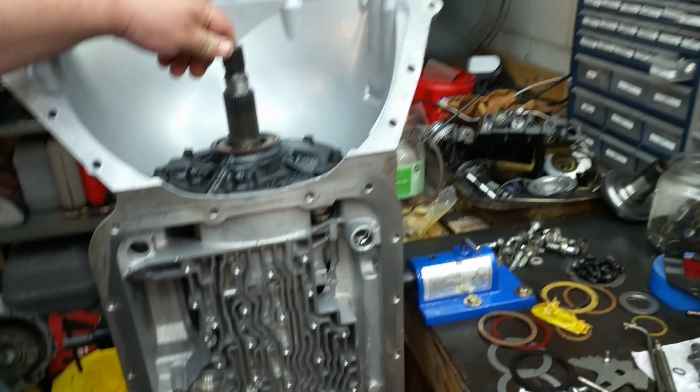Anyway, we're in the final stages of our 4L80E build. We've got all sorts of the insides done. I've been doing just a few minor things outside, like I put the other cooler line fitting in here, and I got the speed sensor in, and then the plug in the rear.

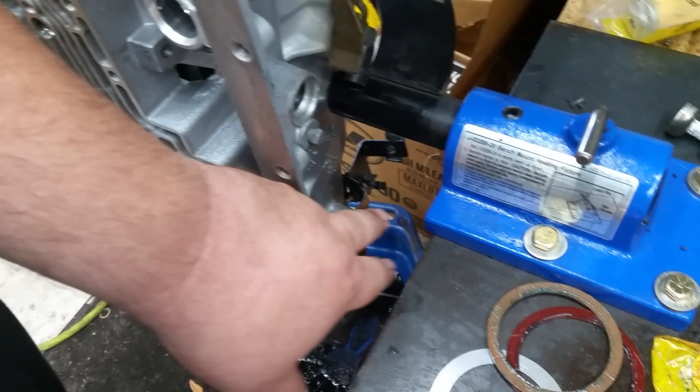If it's two-wheel drive, it'll have another sensor back there instead of a blank plug. But this is a four-wheeler, so the other sensor's actually in a transfer case. I went ahead and put my seal in for my shift linkage, and we're going to work on getting that together, and a few little other odds and ends.

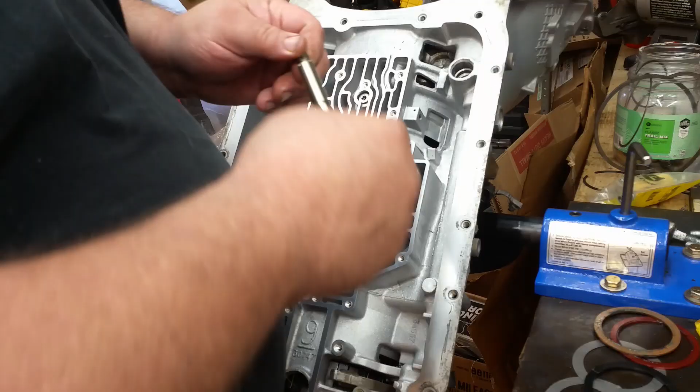So all right, let's start with the shift linkage. Now this rod, the flats are going that way, so this rod will go in here like that. Then you've got your rooster comb, is what I call it, and then you've got your park pawl rod, and this rooster comb goes in the only one way it goes in. There we go. And then this will lay down in here like that. Then your rod will go through, it'll sit just like that.

Then you've got a nut that goes on there, which is right here. That's going to slide on there first. Then that'll go in there, and there's a pin that goes in there. I actually call it a nail, and that's all it is. Here, I'll hold it between my fingers. It's just a little nail, and that's what holds your linkage in. Kind of tap it back in there. There we go. And that locks that in.

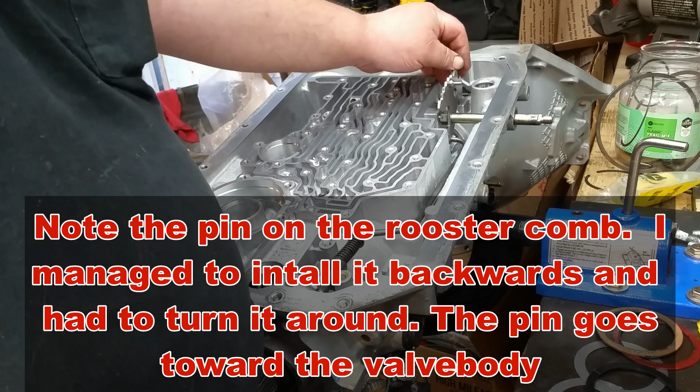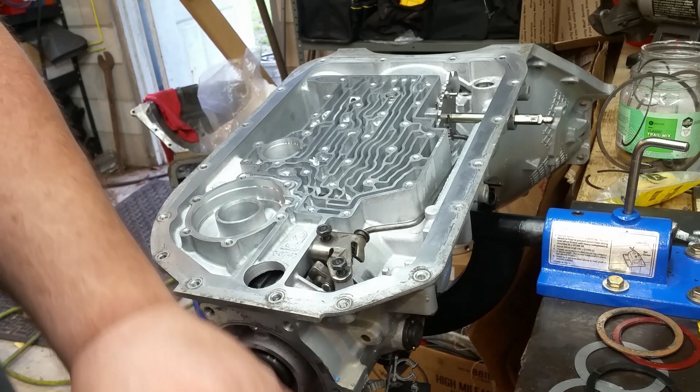Then you just take a wrench and tighten up that nut, which I believe is a 5/8. Yep. Okay, there's that. So you get your rooster comb in. And then you get your park pawl lever or reinforcement. And you got these two bolts down here. Alright. Torque on that's 18 foot-pounds.

Don't forget your spring on this. You know your park pawl's right if it locks when you put it in park. Alright, so we got that. Now it's on to the servos. I guess I need to get the servo.

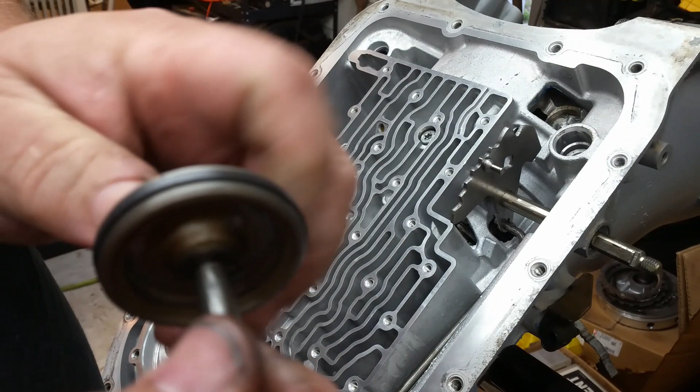Alright, this is your upper band servo. And it takes this pin right here, on this piston. So on this 2-1 apply pin, there's a little E-clip that goes here. There's a spot in the shaft, and you'll have that sticking up. And it takes a Teflon seal ring, and then your spring goes underneath of it like that.

So lube up the bore, lube up your pin and your seal ring. Put your spring in there. This will take a little bit of force to get it in, especially because it's got that Teflon ring on it. And there you go, just like that.

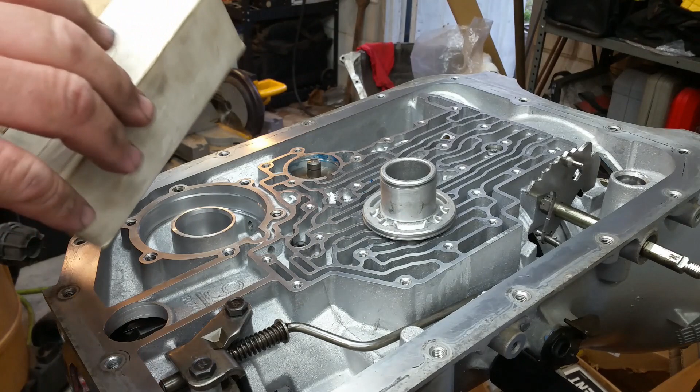Okay, now we're going to do the low reverse. So for that, we're going to need all the low reverse stuff. This is your outer piston. Then you've got an inner piston, and then you've got your cover. But before we do that, we need to check the length on this pin, make sure this pin's the right length. So to do that, we actually have the tool for it, which is this dude here.

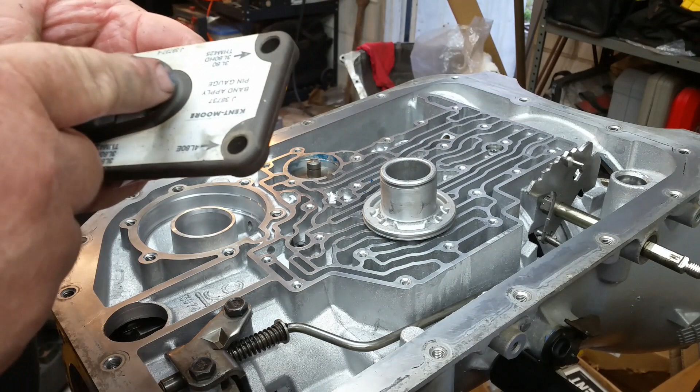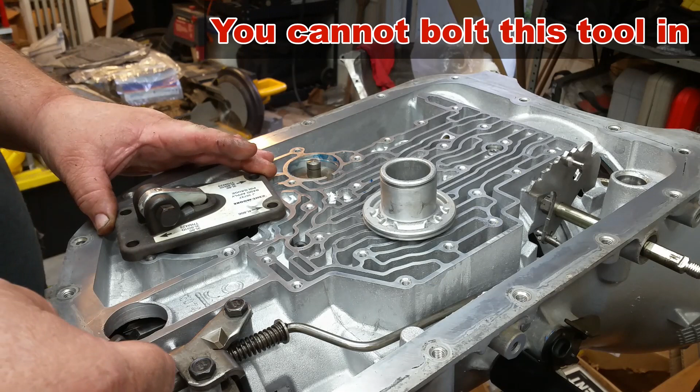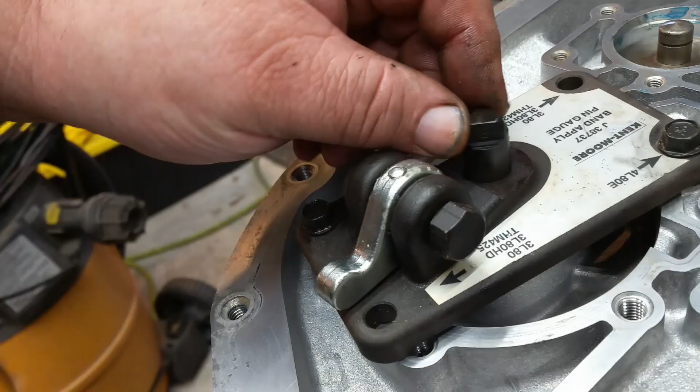And this land has got 3 sides on it. This right here, they're actually numbered too, I do believe. Yeah, it shows A, B, and a C. Okay, so that's what you want to look at. All right, so 25 foot-pounds.

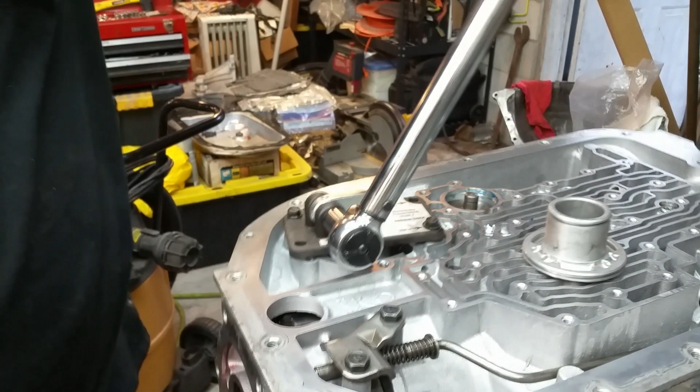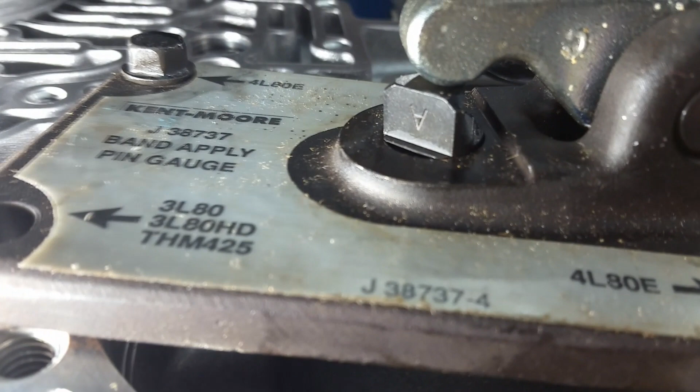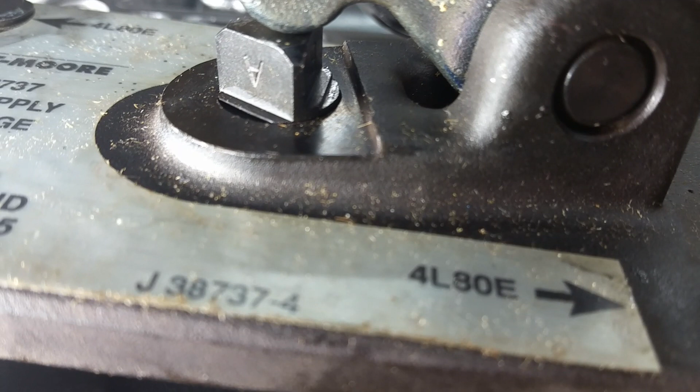And whichever one is flush, if you notice that one there, hang on a minute, you can't see. Alright, if you notice right there, that A, there's 25 foot-pounds, it is flush with the tool. So that's the pin that you'll use, is the A pin. So we need to look at our pin and see which one we've got.

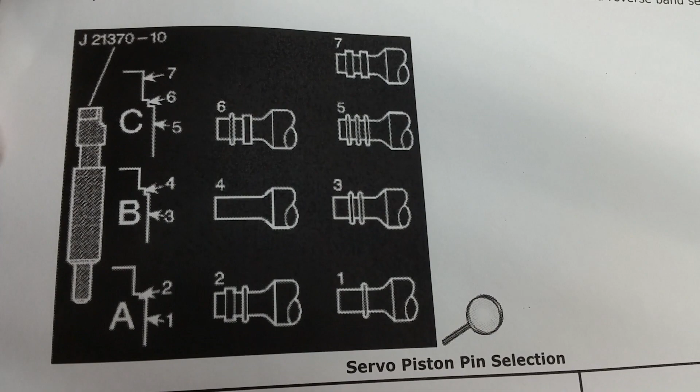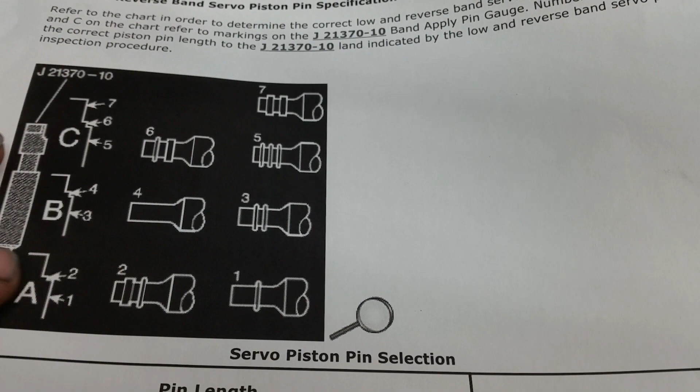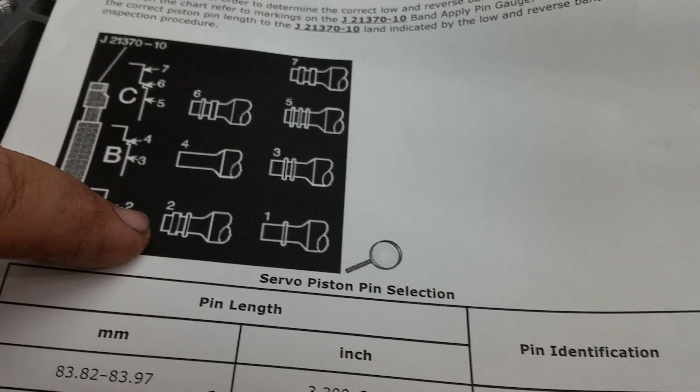Okay, y'all, I went and printed this chart off. So there's 7 different pins that this thing can use depending on where your test pin is. Now, if you remember when we did this, the top flat, which would be that flat right there, it was level with the tool. So being as a number 2, that means that I'm supposed to have a thick flat and a thin flat. I'm going to show this again just so you can see.

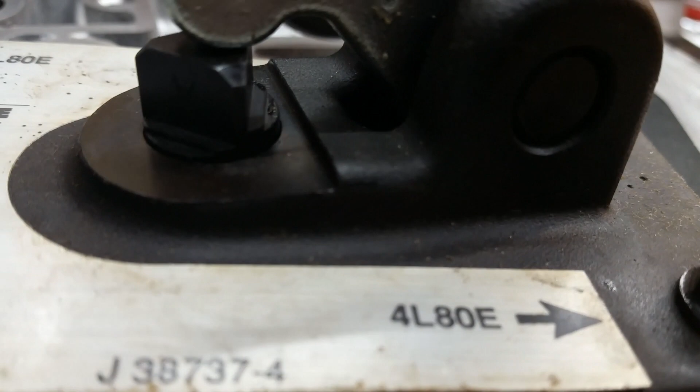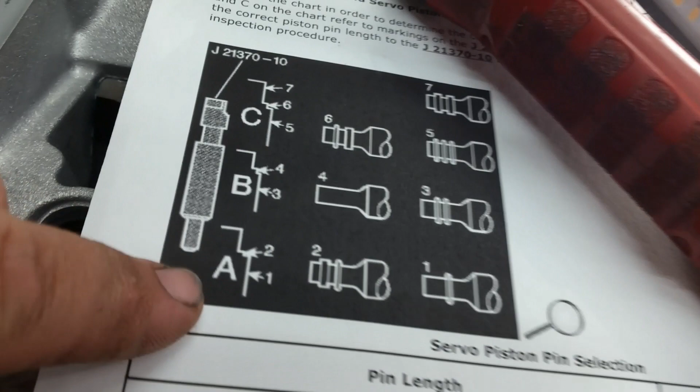Shed a little light on the subject here. Alright, there's our A. See, we're level with the tool. So you match it up with A here, and since I'm at number 2, that's the pin I need.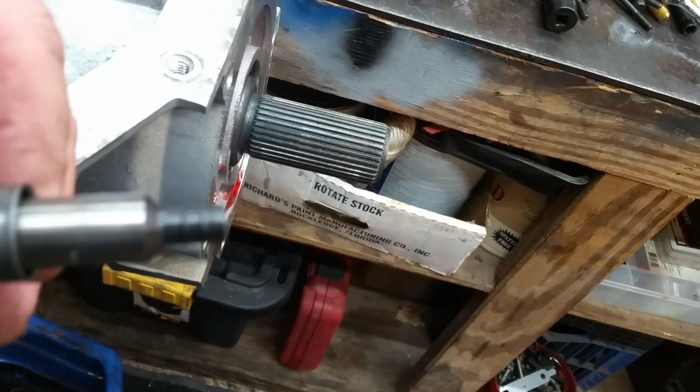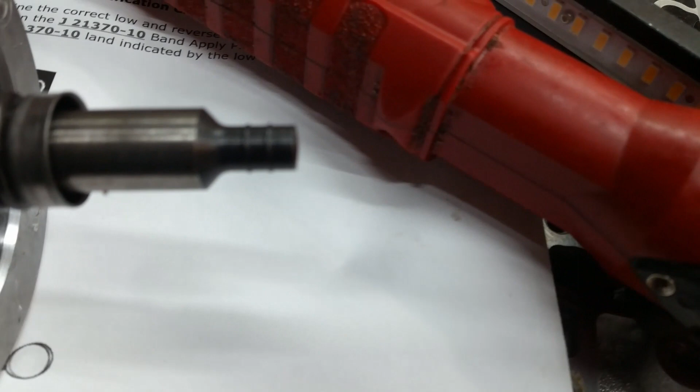So if you notice on here, this is the pin that came out of it. See if it'll focus in on that. There we go. You notice how it's got 2 thin flats. So this is going to be the wrong pin. 2 thin flats would have been a number 3 B, which I'm not.

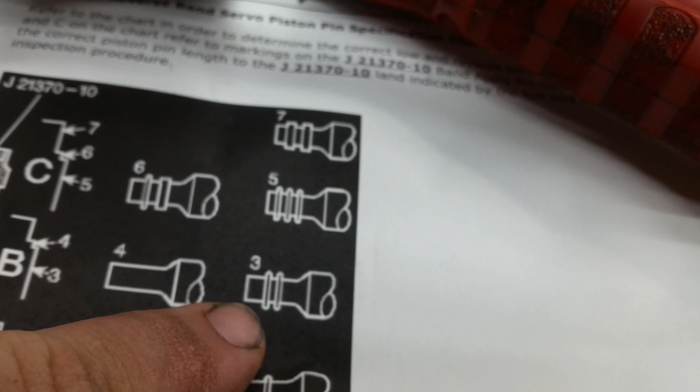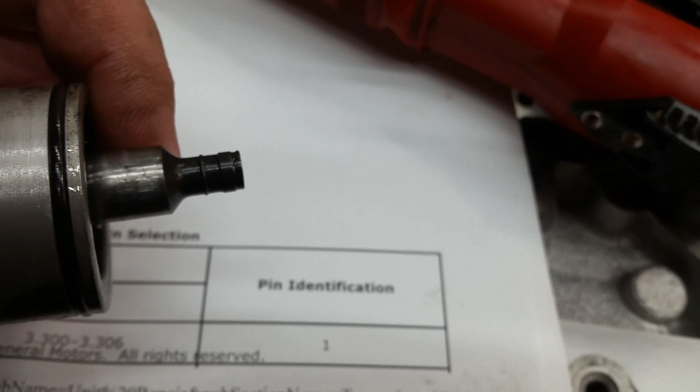So let's go over here to our burnt up 4L80, and that looks like it has the right pin in it. You get a flat on the end and a thin above it. Which, according to that, that's what I need. So we've got a flat, thick flat, and a thin one. So we've got the right pin. So that's the pin we'll use.

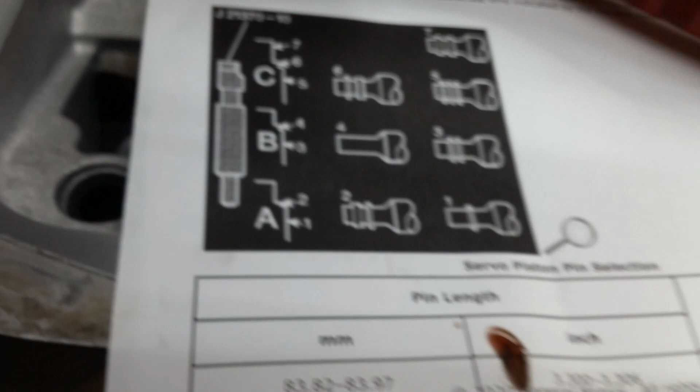Alright, y'all, so I got my, you can see that a little better now. There we go. I got my pin swapped over, and I know you're all asking, why don't you just take that other piston out? It's because this one's already clean. And I got it swapped over. This is a Teflon seal ring that goes on that one. And same for the inner piston. It's got 2 Teflon seal rings on it, which I've already got.

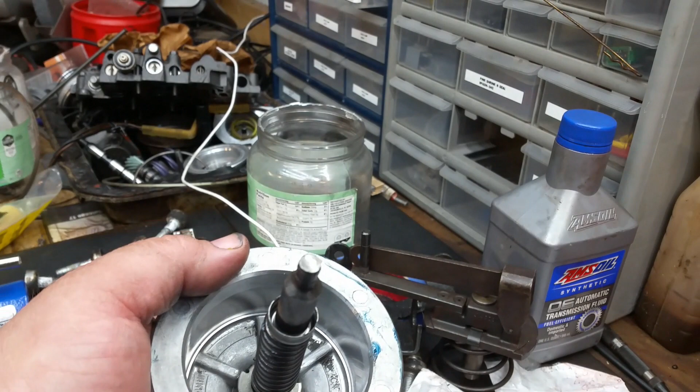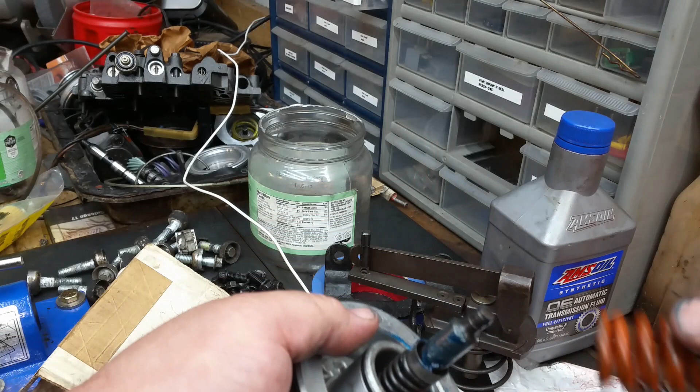This piston here will go inside this one. So just slide it in there. And then this big orange spring goes inside there. Now we have to take our tool off.

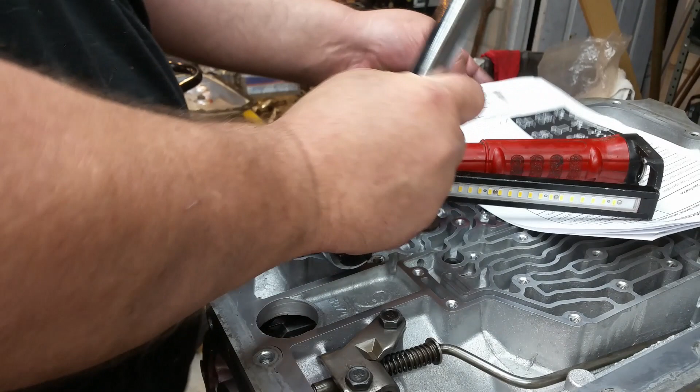I don't know what it is with these little black bugs, but they're really starting to irritate me. I really don't want them inside my transmission.

Alright, take your tool out of there. We're going to do our normal, or give it a little love here. Make sure to get both the bores inside and out. And then it's going to take this metal gasket. And if you notice, it's got one spot on it that's different, and it goes just like this.

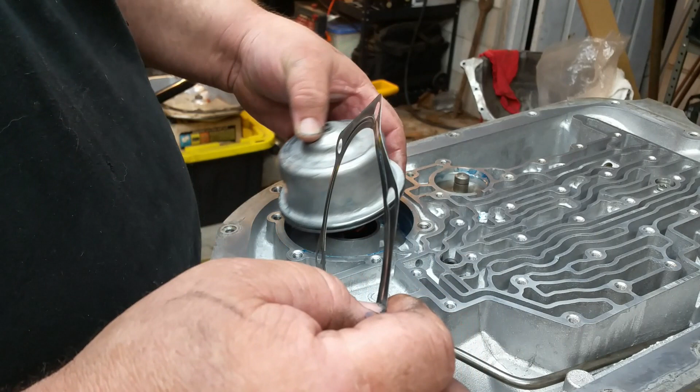And flip your piston down in there first. We're going to put this inner piston in first. There we go. Alright, that's all there is to that. Don't try to push it any more than that, because the bolts will draw it down. And then you need this big steel cover. Again, it's got a cutout for that spot in the gasket.

And put all your bolts in. Alright, torque on those bolts is also 18 foot-pounds. Tighten it just like you do a tire, in a crisscross.

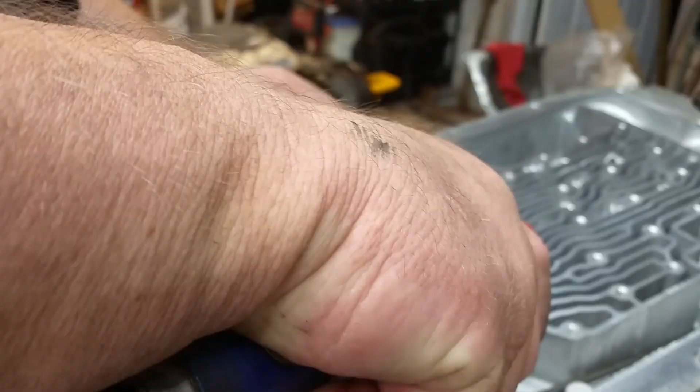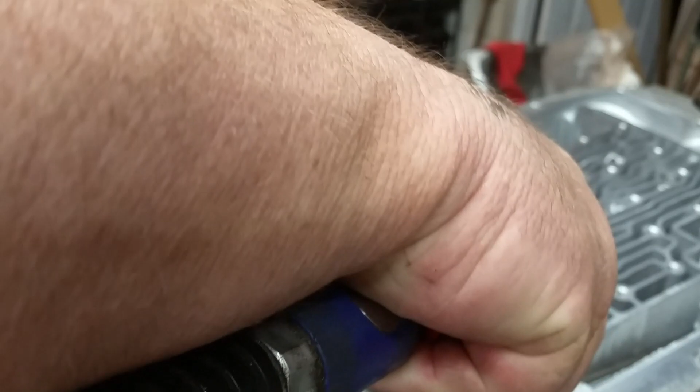Alright, to test this dude, you've got two ports. You've got one right here, you got one right here. Let's go turn the air on. Sounds like we got a good band apply. Check this other one. Alright, we got a nice solid thud out of that dude. So we're good as far as that's concerned.

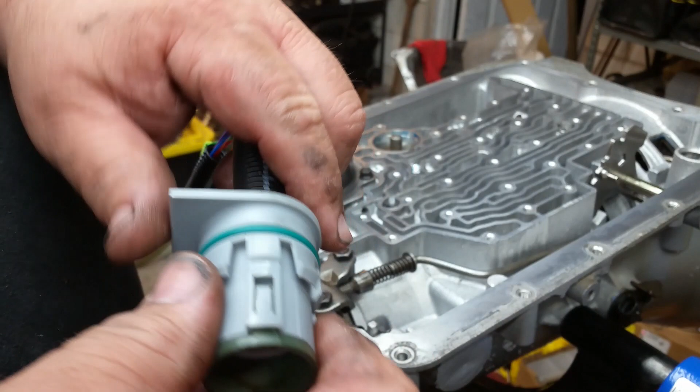So we just got a few little odds and ends we're going to do yet. Need to put our harness in. I got a new harness for this thing because the old one was missing the inner piece for the connector. And as I recall, when he brought it to me, it was leaking like a sieve. It was missing the centerpiece that goes in here. Now this one's already got an O-ring on it, so just lube up your bore right here.

Yeah, you might want to take my cover off here. You can go ahead and lube up your O-ring. And the flat part goes up. So slide it down in there. Just like that. So your harness is ready to go.

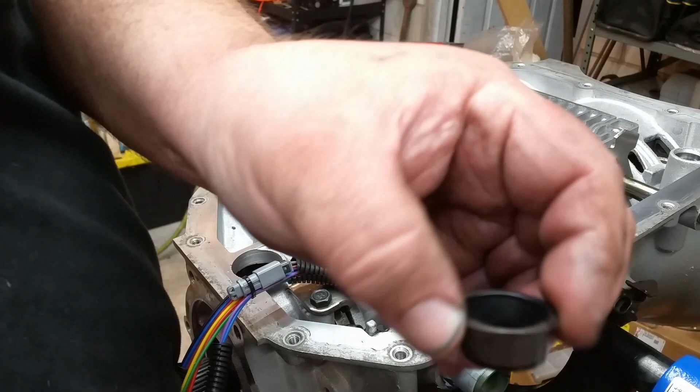We need to put in our filter O-ring or filter seal, which is this dude here, and it goes up here in this hole. I just use a little socket. Just like that. And we're going to end it off right there for this video, because the next thing we're going to do is the valve body, and the valve body is going to be a little more in depth.